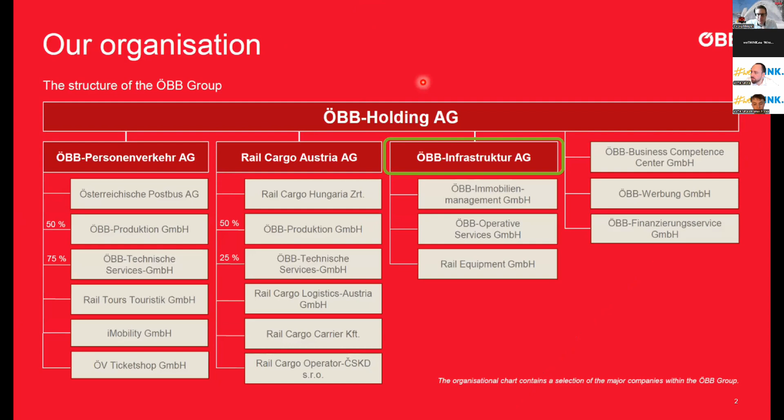For those who don't know it, we are the rail infrastructure manager of Austria and part of ÖBB Group, besides Personenverkehr, passenger transport, or rail cargo, and some subsidiaries. We plan, build, operate and maintain the Austrian rail network with approximately 19,000 employees, 7,000 trains a day,

278 million passengers a year. And these 71 railway companies on the network and seven rail freight terminals protect the climate together with, at the moment, eight hydroelectric power plants.

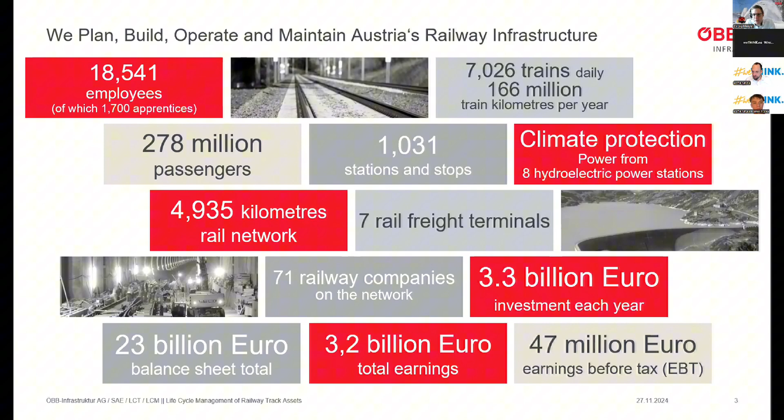But what's the content for today? I want to cover the whole lifecycle management and draw a little bit the bow from the engineering part via a costing part towards an applied lifecycle management, and to finalize with a short insight into our IT tool that is calculating our lifecycle costs. It is called LCM Assistant.

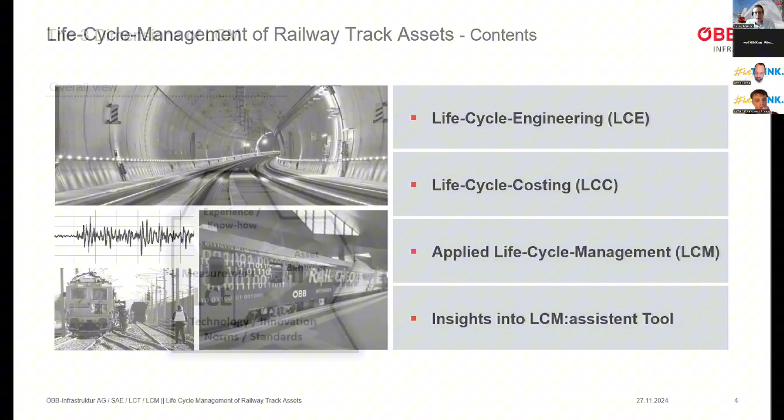So I want to start with what is lifecycle management, or better, what is our definition for lifecycle management at ÖBB Infrastruktur? We have three dimensions of lifecycle management as an overall view. We start here with the basis. The basis is the engineering part of the life cycle story. It's the life cycle engineering. It's based on measurement, on technology and innovation, norms and standards as well. But also, and especially, there's much experience and know-how inside the life cycle engineering.

And here we result in the asset behavior. The asset behavior is the basic end of the technical part in describing the life cycle of the asset. And after this life cycle engineering, we come to the economic aspect, to the economic evaluation based on life cycle costing. So here we have the costing aspects of the life cycle. We have maintenance costs and especially renewal costs, and we have costs of unavailability of the asset, the system, so-called the costs of operational hindrances.

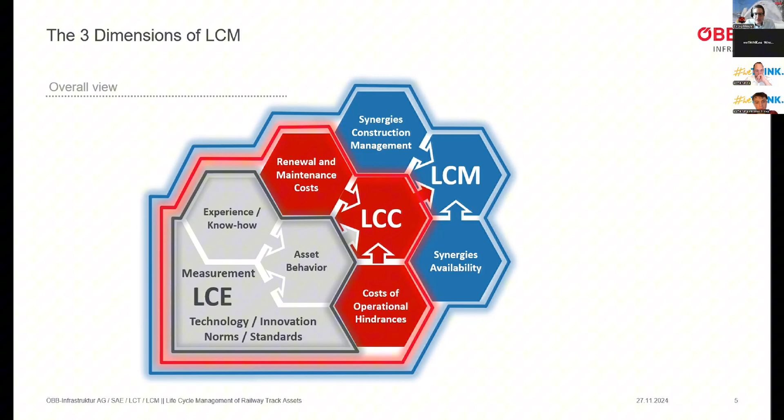So far, this has all been based on one asset type. We come now to the evaluation across the assets. We add synergies in construction management and optimize the availability of the assets when we combine the several construction sites. And all in all, we guarantee with this LCM approach for sure safety, but also optimize the availability and the economic efficiency. So these are our three dimensions of LCM.

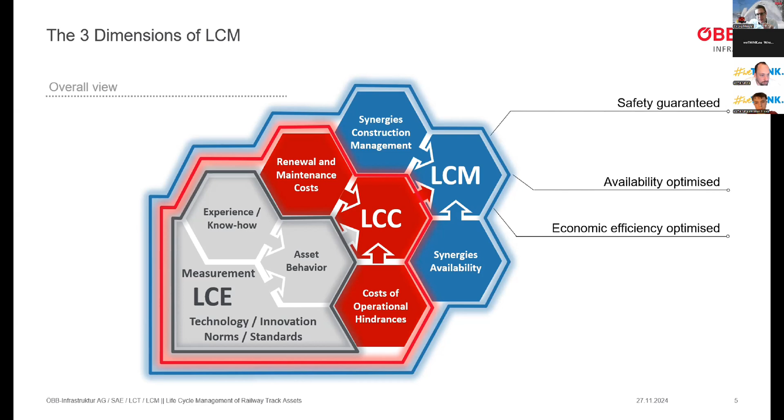And now I want to go into each of them to describe a little bit more what we deal with and what this theme deals with. We start with the lifecycle engineering, getting closer to the technical part. The results of this lifecycle engineering will be the technical condition forecast for components and parts, and a prognosis of maintenance measures, maintenance actions.

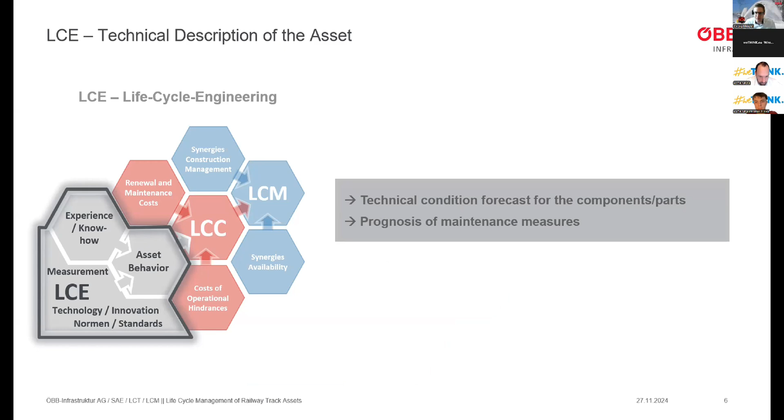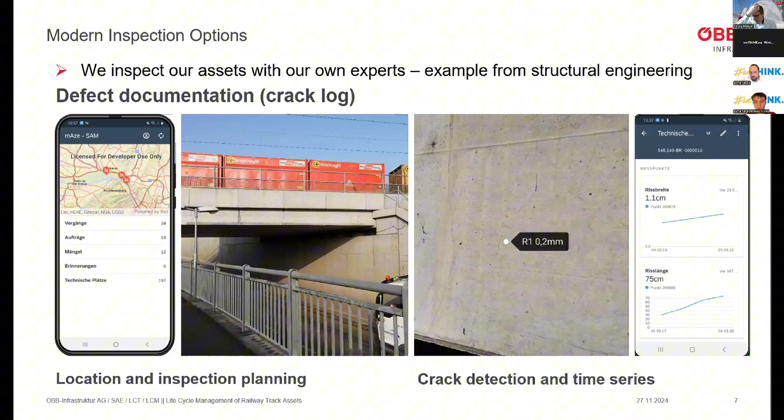But how do we get these results? Let's see. We have modern inspection options. A lot of experience and know-how is added by these things. We inspect our assets with our own experts. An example here from structural engineering: here's a defect documentation, a crack log, and we have location and inspection planning. And we have crack detection and time series with these cracks. We have these applications for smartphones, tablets, laptops in our cloud, and this is an input for our data analysis.

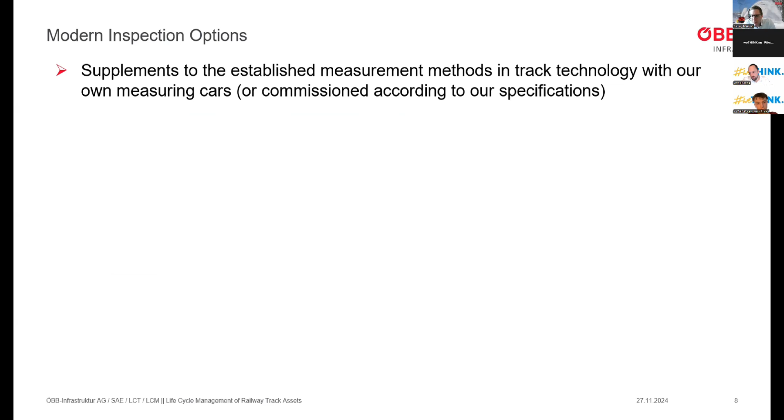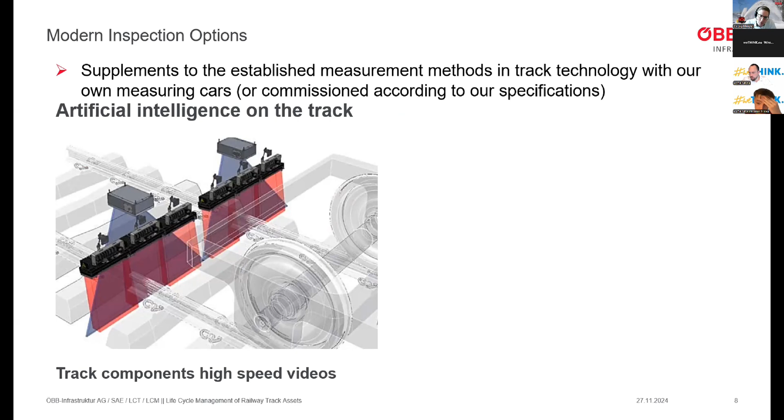Then supplements to the established measurement methods in track technology with our own measuring cars or commissioned according to the specifications we do, and we focus there more and more on artificial intelligence on the track to deal with high-speed videos for track components, error detection with image recognition, and we receive a component deterioration with this artificial intelligence.

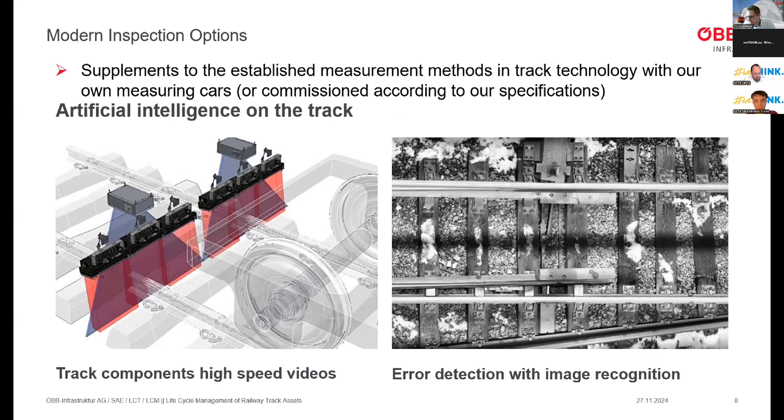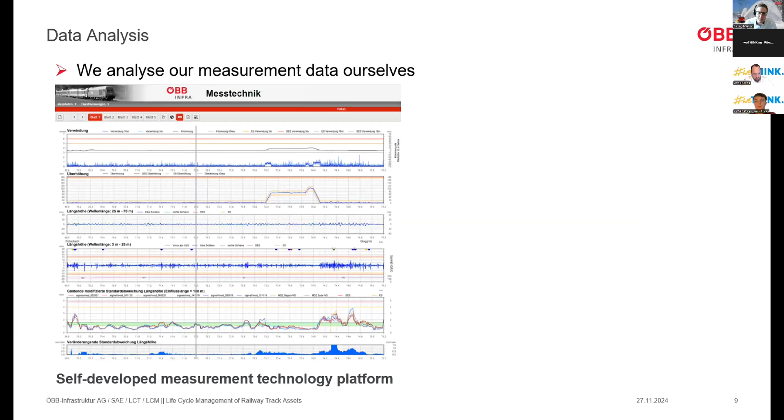Afterwards, we analyze our data. We analyze our measurement data ourselves. This is important for us. We have self-developed measurement technology platforms. We use the correct positioning to get the right time series. Isn't the right positioning the basis for a correct time series? And we have all our separate tracks with GPS coordinates so that we can assure a correct deterioration.

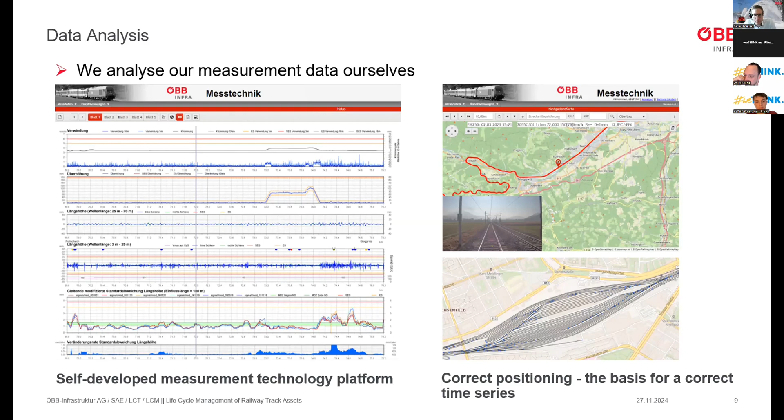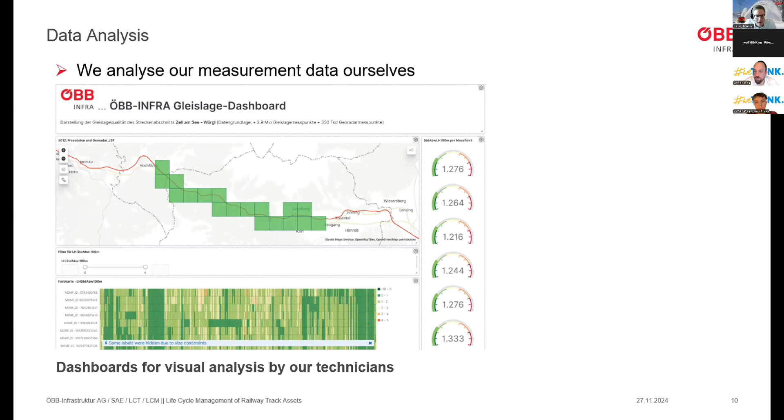We have other data measurement analyzing tools, dashboards for visual analysis by our technicians with different views and layers and zoom levels. And as an example for wide ranges for evaluation, here the correlation analysis between measurement signals.

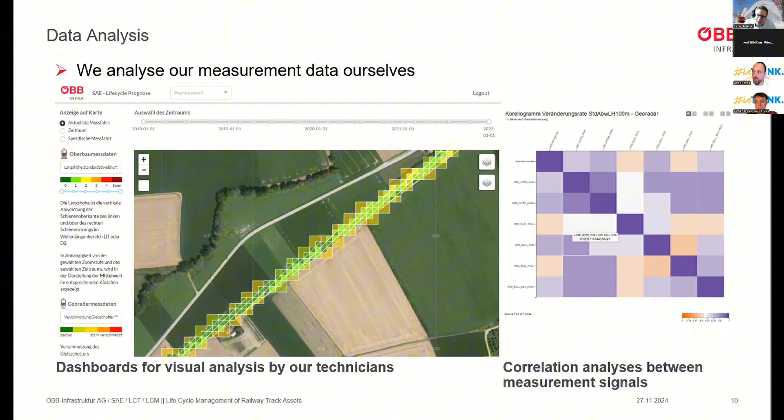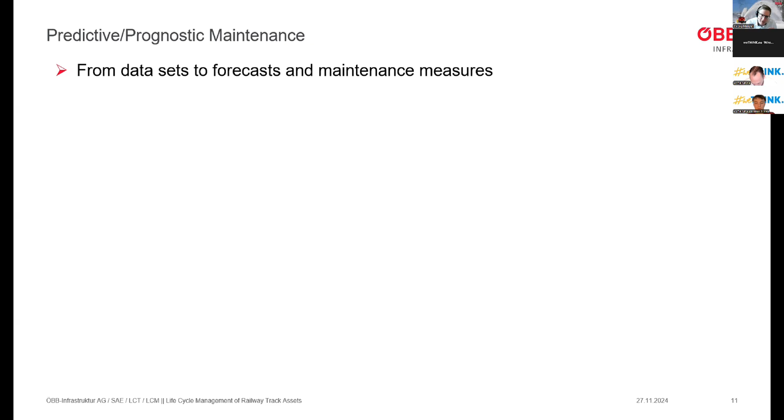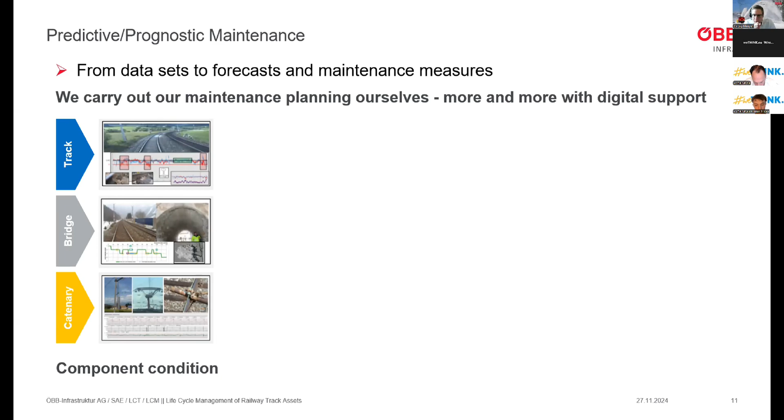Then we come to the most sophisticated part of the maintenance data analysis. It's the predictive, the prognostic maintenance. We go from the data sets to forecasts and maintenance measures. So first of all, we have a component condition. And then we come to a component deterioration. This is more important than the condition because it's important if the condition tomorrow is bad or tomorrow is as good as today.

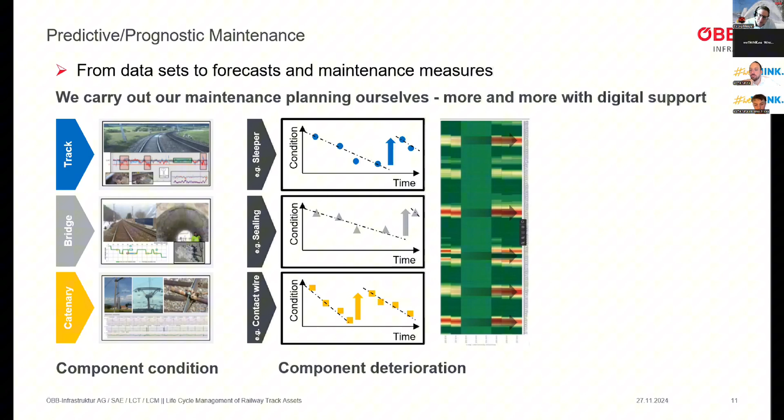And then this is the real sophisticated part, from the deterioration to the real maintenance action in the predictive maintenance, because it's different to just go via a condition that is over some threshold than to do the real planning of a construction site. There are boundary conditions you have to include into your planning. So this is the most sophisticated part of the predictive maintenance.

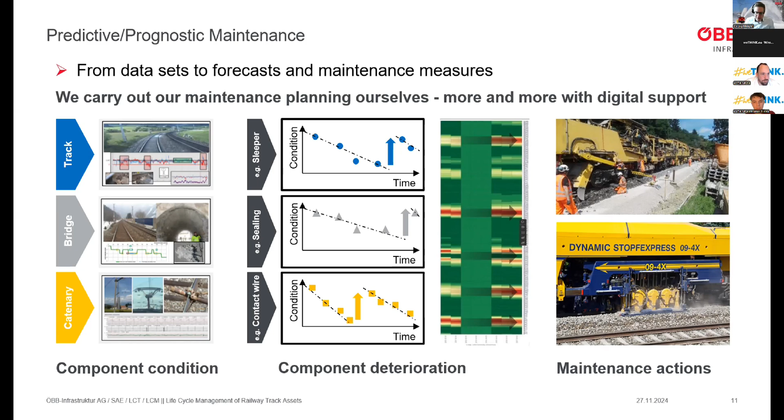And we carry out this maintenance planning ourselves, more and more with digital support. I don't say that we use artificial intelligence for everything, but we more and more use this framework and this support for planning our maintenance actions. And this is, so to say, the end of the real technical part of the life cycle story, because we come now to the costing part of the life cycle, to the evaluation of the previously mentioned measures.

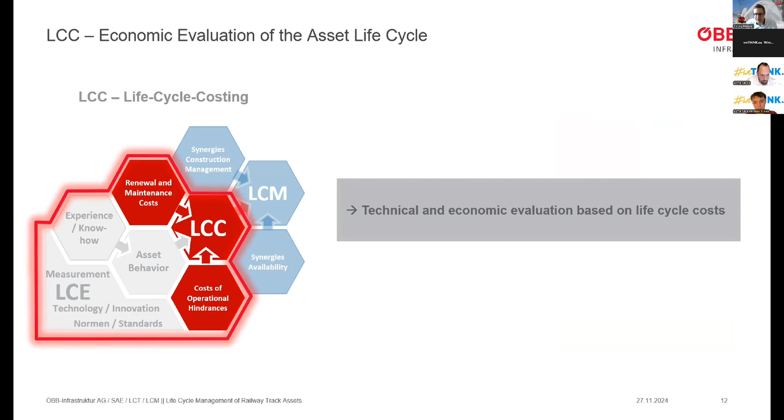So we define technical and economic evaluation based on life cycle costs. The technical part is the base, and now we do the economic evaluation of this life cycle. This is the result of the economic evaluation of the asset life cycle. How does this look like? We go from the technical to the economical part. So we base, as I said, on the technical part.

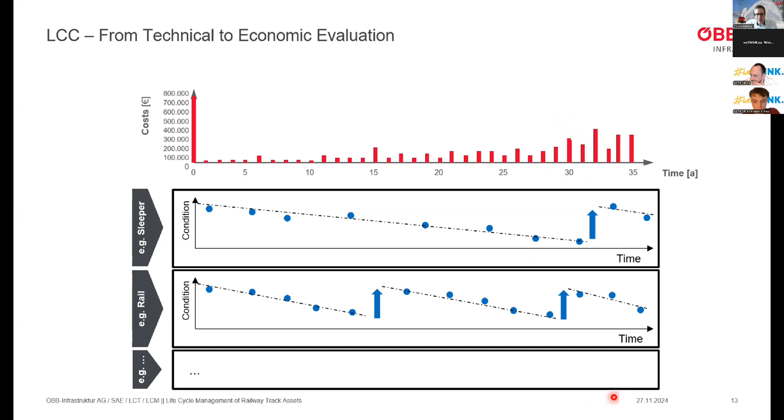Here are the corresponding life cycle costs for this life cycle. And you see the LCC rise in the end of the row. And here you see, before the start of the rise is the optimal point in time for the renewal of this track section. For sure, not later than this part. Much later, you have to analyze it, but not in the years afterwards. This is basically a boundary, but also not too early. Here, these years are the best renewal time for an exchange for this asset group.

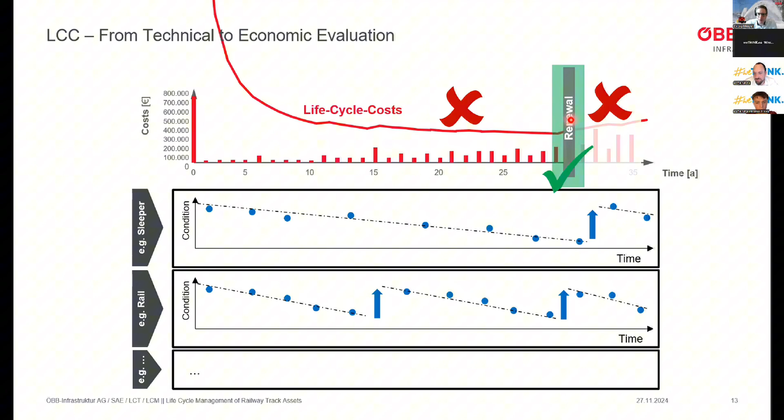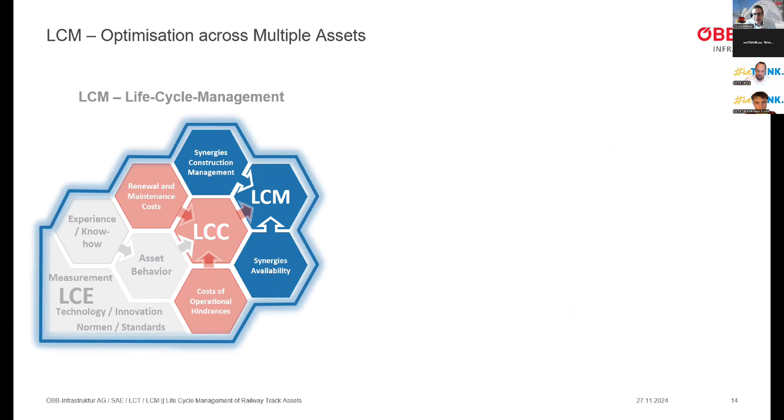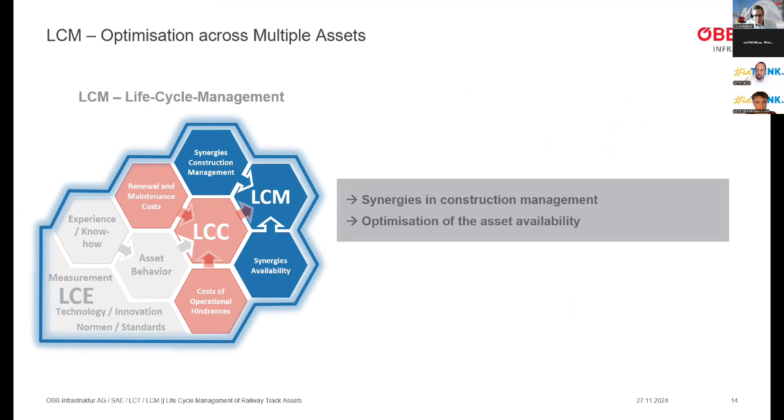And now we come to maybe the supreme discipline of lifecycle management, the optimization across multiple assets. We combine several construction sites and get, as a result, synergies in construction management and optimization of the asset availability. What is lifecycle management? Yeah, and why at this moment? Because now, to describe it in more detail, here is a graphic for the so-called overall approach. Till now, we had just a component approach or asset type specific approach. And now we have here an overall approach.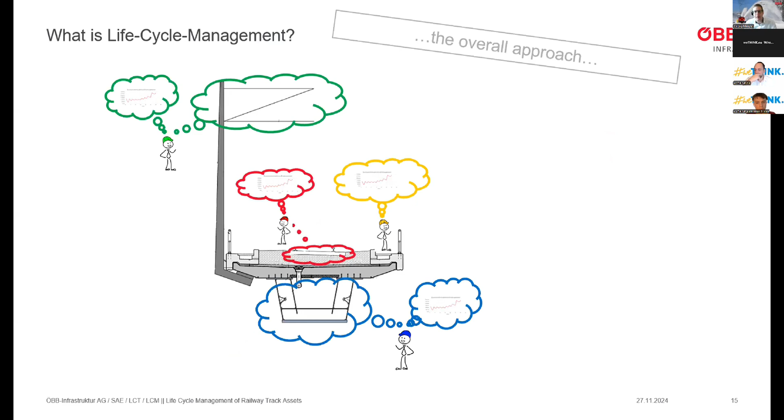We have catenary, we have supporting structures, we have cable and safety systems, we have track, and we combine these asset-specific lifecycle views in the overall LCM concept. So the lifecycle engineering part and the lifecycle costing part is done within each asset type. And now we combine it in an applied lifecycle management and overall approach at our lifecycle management model.

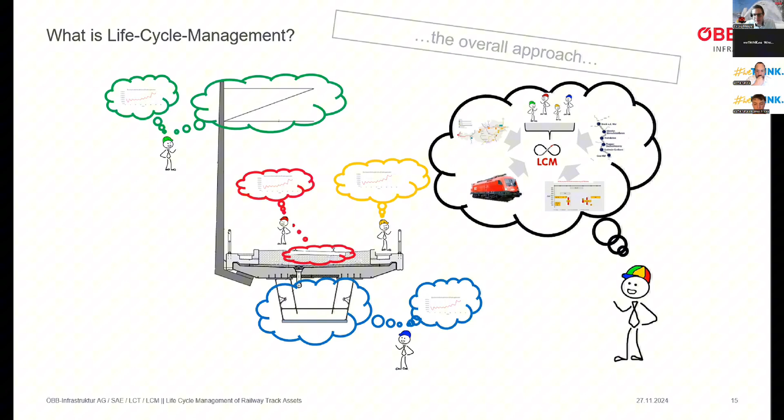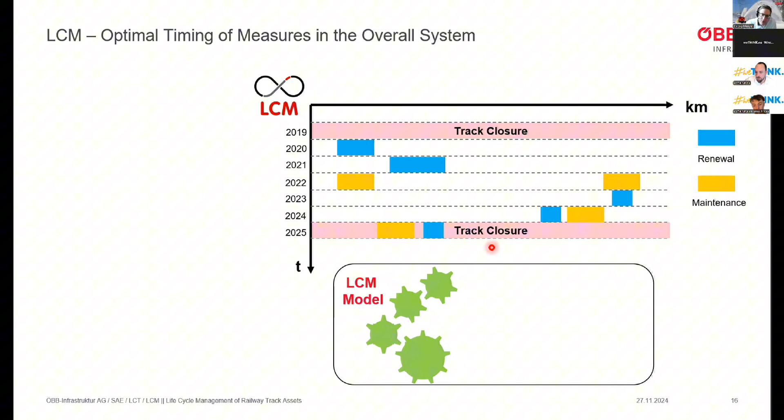And with the building blocks we had, the building blocks of lifecycle management, this LCC per asset type, as we heard before, the costs of operational hindrances and the synergies all combined result in our overall view, to get the technical and economic optimum in the overall system.

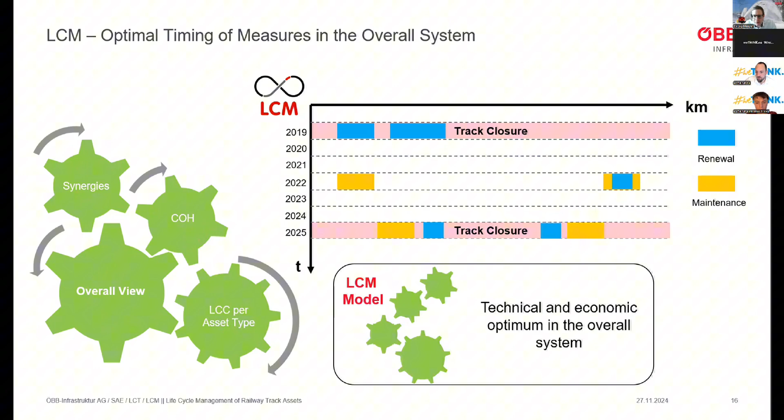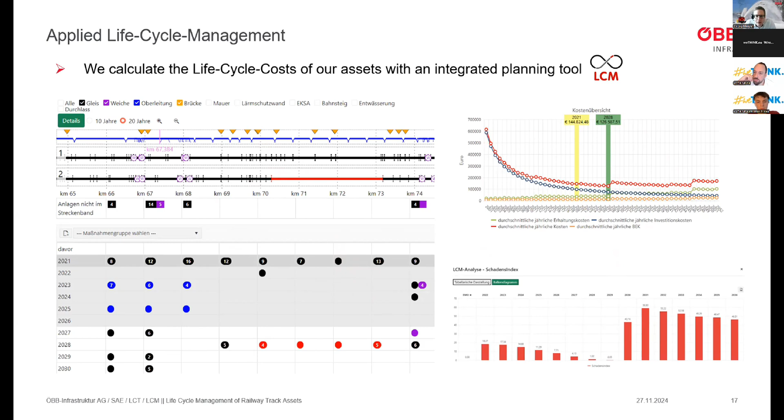How do we achieve this in practice? We calculate the life cycle costs of our assets with our integrated planning tool. I said it in the introduction. This is called LCM:assistent or Lifecycle Management Assistant. There are dashboards with tracks and planning periods, display of the individual LCC at that section. But more here in a quick look at some of the evaluation levels of the tool.

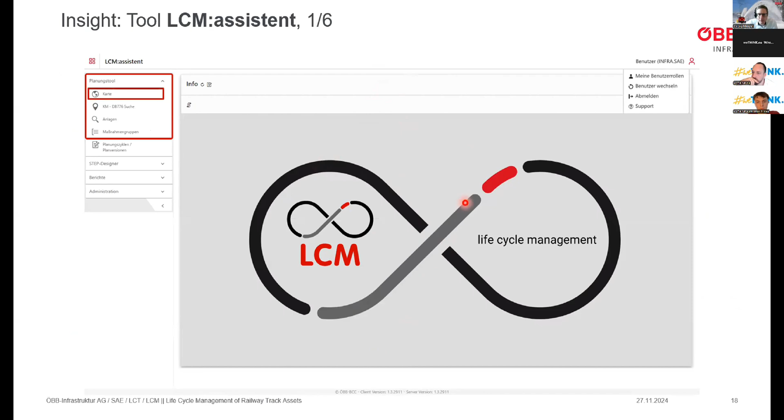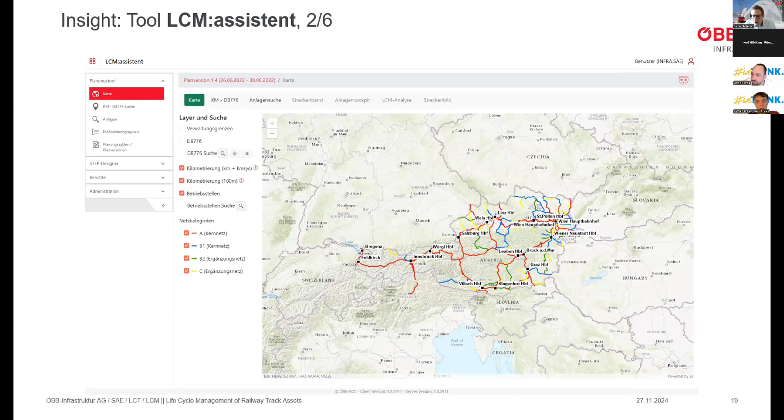The switches and catenary, bridges, walls, and we have noise protection, but there's no noise protection in this example. We have railway crossings, railway crossing safety systems, especially here, platforms, drainage, pipe passages, so to say. And not on the screen and in the route, the control center and the area of the control center.

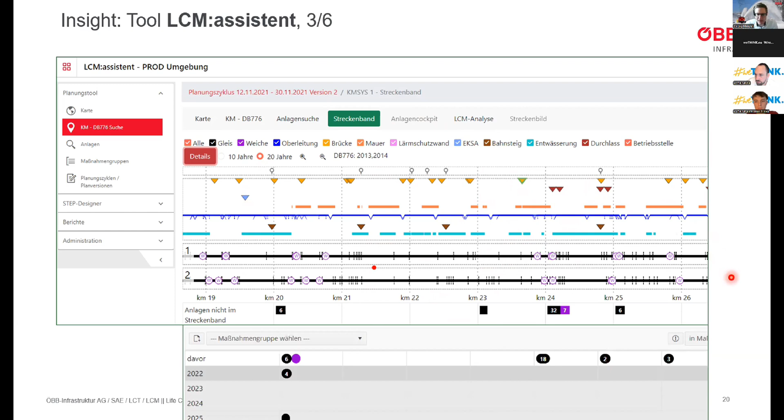And below this route or track tape, the LCC optimal times for renewal of the assets appear in this planning period, from this year to our frame boundary here in gray and afterwards. So for the example, we can tick here an asset. Here, for example, a track section with an optimal point of time of the renewal in 2037. It's just an example to get a look at the functions of the tool.

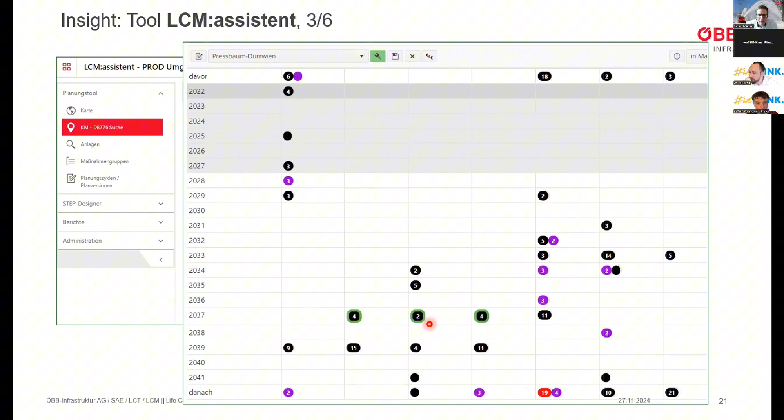And if we click and go into this asset, we get the LCC function of this asset with this corresponding LCC optimum in 2037. Besides, all assets in the network have a calculated LCC function in the background. It's about 250,000 assets that are basically calculated with an LCC function for the technician, for the user of the tool.

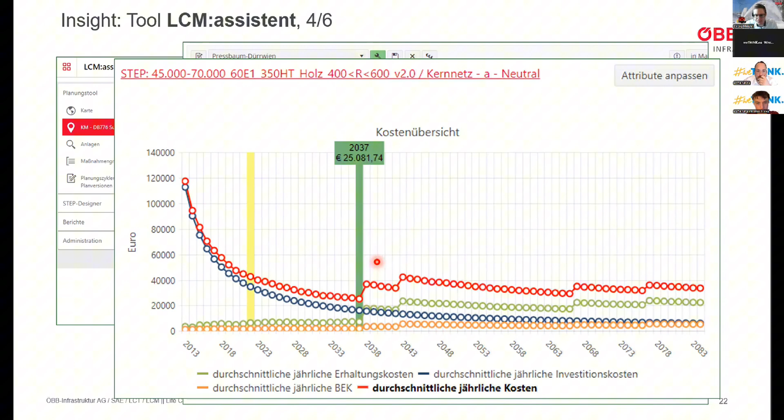And now we come to the evaluation across the assets. So it's the LCM analysis. We can see here the optimal time for renewal of these assets with the minimum life cycle damage. We call it life cycle damage. For the details, formally, according to this system, the damage here in the individual measure optimum is green at the top, but this is only theoretical.

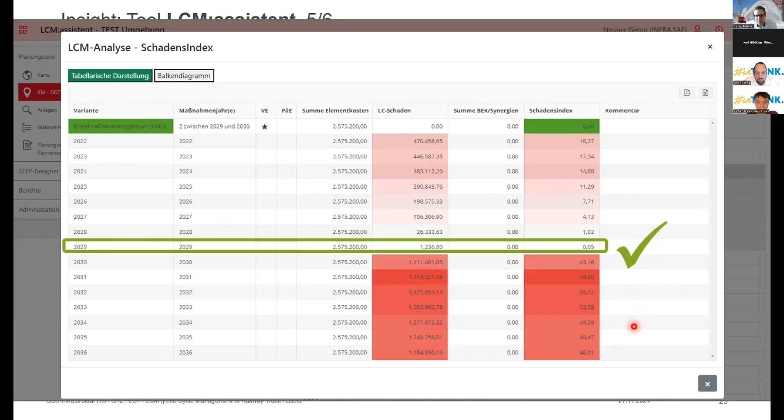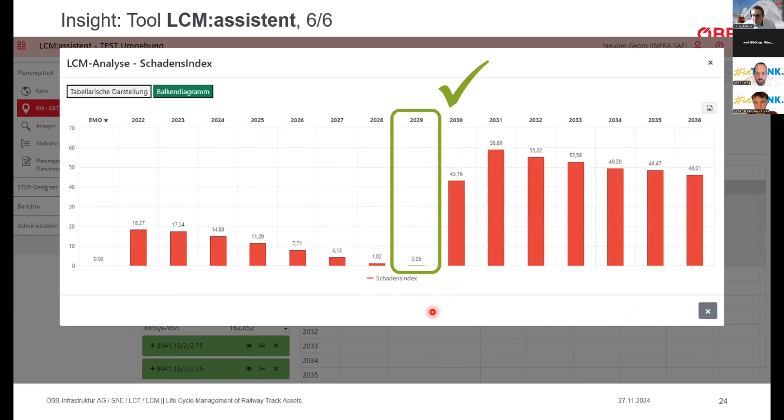And here another view at this LCM result within this time row. Again, here the optimal point in time to renew this asset. And now it's possible for the asset engineer to directly transfer the project into the approval process. And we start here the challenging process of the project within these results of the LCM analysis. But this is another story.

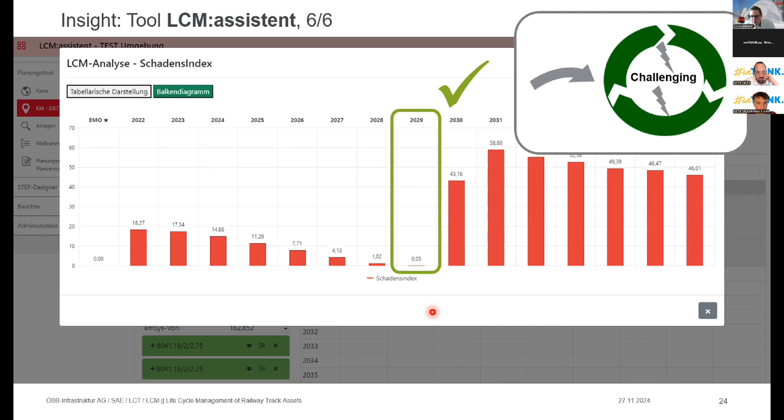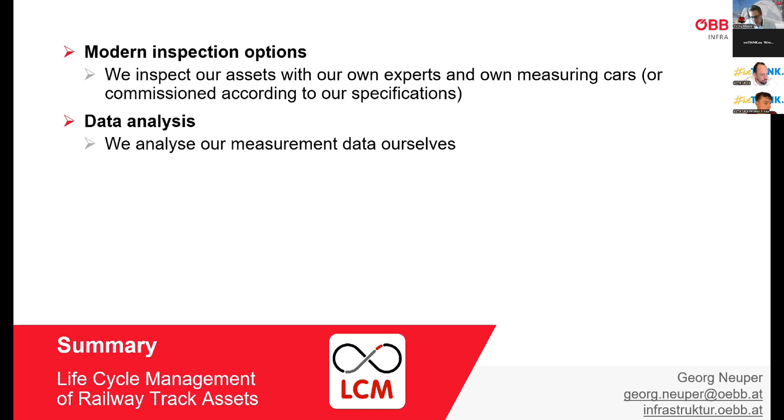Okay, to conclude my short overview, what do we need for modern lifecycle management? We need modern inspection options. We inspect our assets with our own experts and own measuring cars. We do data analysis. We analyze our measurement data ourselves. We do predictive maintenance more and more with digital support, and we carry out our maintenance planning ourselves.

And we bring it all together in an integrated lifecycle management. And we are convinced that this is the key to system optimization for lifecycle management of railway track assets.